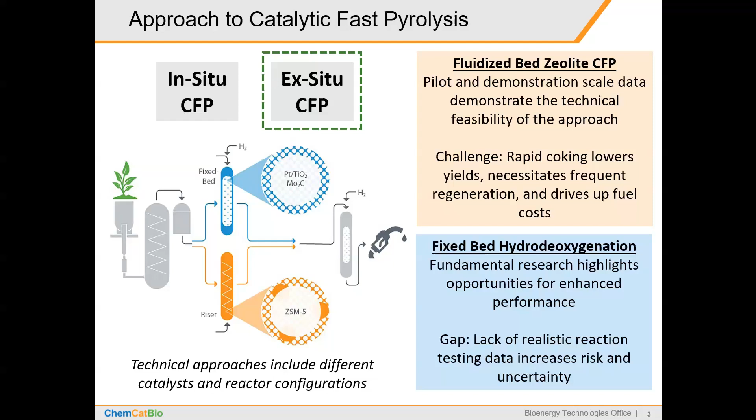But really, the gap here is that a lot of this data has relied on model compound reaction testing or been performed at the microscale and not always in a continuous fashion. And so there really is a lack of realistic integrated reaction testing data, which serves to increase the risk and the uncertainty of this approach. So one of our goals with this project experimentally has been to help close this gap by providing an industry-relevant experimental assessment of fixed bed hydrodeoxygenation.

And so to do this, the feedstock that we used was a commercially harvested combination of debarked loblolly pine stemwood and forest residues, which was procured and processed by our partners at the Idaho National Lab. In terms of the catalyst, we used a platinum supported on titania material that was developed here at the National Renewable Energy Lab. The metal loadings for this catalyst ranged from 0.5 to 2 weight percent, and importantly, for the data that we'll show today, all of these materials were prepared with commercially available technical supports as opposed to powders.

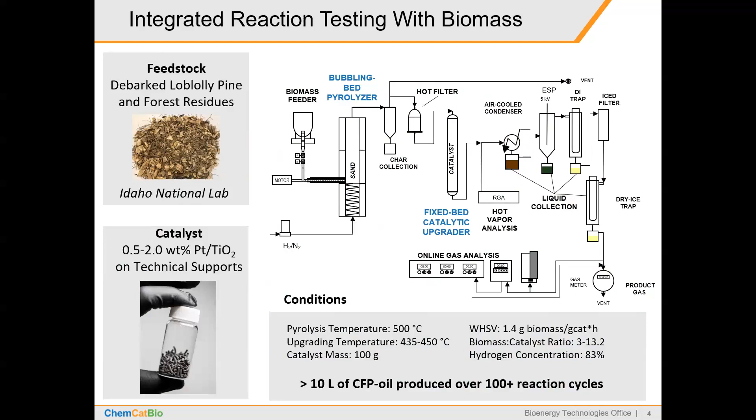The reactor system that we used was one of NREL's large bench scale integrated reactor units. It was operated near atmospheric pressure with about 100 grams of catalyst per experiment and a biomass flow rate of between 100 and 200 grams per hour. And one of the nice things about this reactor is it allowed us to collect considerable quantities of upgraded CFP oil for downstream processing as well as detailed analytics, on the order of 10 to 12 liters over the experimental duration.

Okay, so just very briefly touching at a high level on some of the data that's been collected, and as an aside, there's certainly more information available in the citations shown on this slide and the other slides throughout the presentation. In terms of key metrics, some of the things that we track are the carbon yield of the process and the oxygen content of the oil. What we like to see when these are plotted against each other, as shown in the figure on the left, is high yields and low oxygen content. So shifts to the upper left quadrant are desirable. And in fact, that is what we observed for the platinum titania material compared to a ZSM-5 baseline collected both through our own internal experiments here at NREL as well as data from the literature.

We also wanted to assess the stability of this reaction over about 140 reaction regeneration cycles. And nicely, what we observed after a short induction period was good stability in terms of the carbon yield and the oil oxygen content. Certainly there's more work to be done here to really prove out overall process durability over the long term. But we were very encouraged by this promising proof of concept data set, and I think it showed that our catalyst could be regenerated effectively at the bench scale using fairly straightforward oxidative techniques.

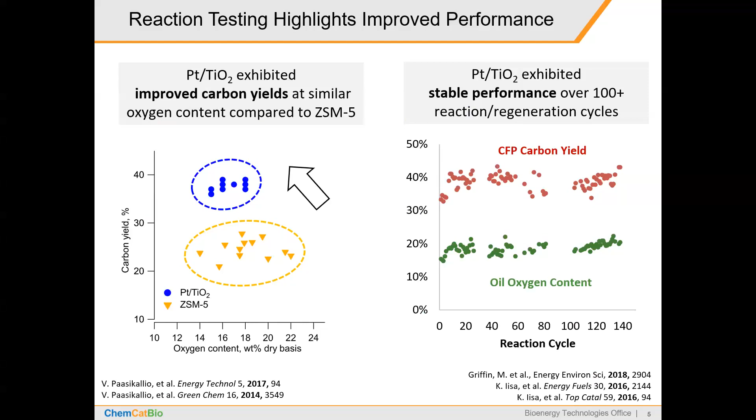All right, so we worked closely with our collaborators, Huamin Wang and his team at the Pacific Northwest National Laboratory, and they did some nice work to show that this platinum titania CFP oil could be hydrotreated using a single stage for greater than 80 hours without any indication of fouling or plugging. The carbon yields for the hydrotreating step were quite high, 89%, and the oxygen content was below 0.2%. I want to take a second to emphasize that this was done with a single stage system. From a practical standpoint, that's an important step forward compared to the hydrotreating of raw pyrolysis oil, which often requires multiple stages for stabilization and is prone to issues associated with fouling and plugging during the feeding process.

So fractionation of the hydrotreated CFP oil showed about 45 weight percent in the gasoline and 39 weight percent to the diesel fraction. This was pretty high selectivity to the distillate range, maybe a little bit higher than we expected before doing these experiments. So that was a nice surprise and aligned well with our goals of producing fuels for the heavy vehicle transportation sector, which is more difficult to electrify in the near term. The fuel testing that we've been able to do for these fractions reveals the need for continued R&D. The octane value for the gasoline fraction was measured at about 65, and the cetane value for the diesel fraction was 24.

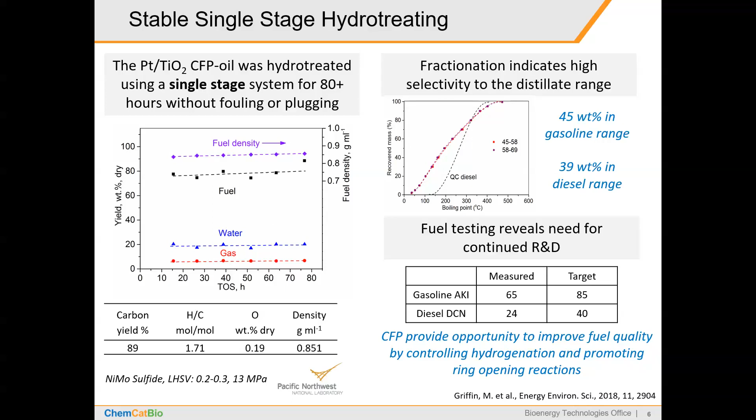All right, so in terms of overall process yield, so CFP plus hydrotreating, we saw values of about 36% for platinum titania compared to less than 22% for a ZSM-5 process. And we know from techno-economic analysis that this is one of the key cost drivers for the process. And so these improvements really do translate to considerable reductions in the fuel production costs. Our conceptual process models indicate a minimum fuel selling price of about $3.80 for the platinum titania pathway. That's for a fuel-only standalone biorefinery approach.

And so it's important to point out that there are opportunities for further reduction through things like refinery integration or the generation of chemical co-products, for example, that could push these costs much lower down towards $3. And that's, again, certainly something that we're continuing to work on. Importantly also, this pathway provides a considerable reduction in carbon intensity. So life cycle analysis shows a greater than 50% reduction in GHG emissions compared to petroleum-derived gasoline and diesel, for example.

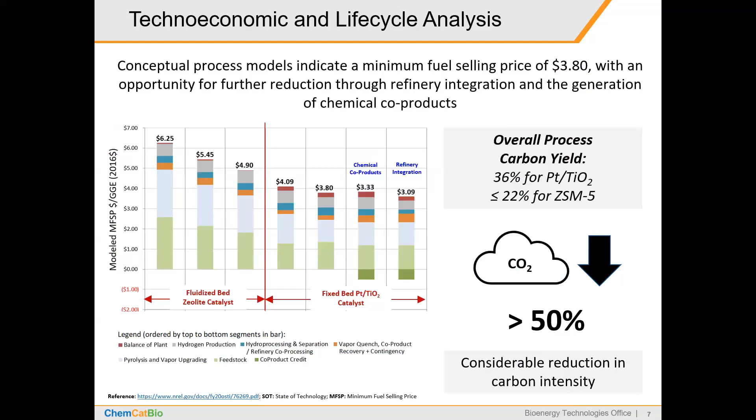All right, so in terms of a summary and research needs, our integrated reaction testing confirmed the potential for improved performance from fixed-bed HDO and motivated investigation of process scale-up. So we saw high yields, improved relative economics, low emissions. The initial assessment of process stability looks good, more work to be done there. And so that really brought us to a point where we're thinking critically about how this technology translates best to

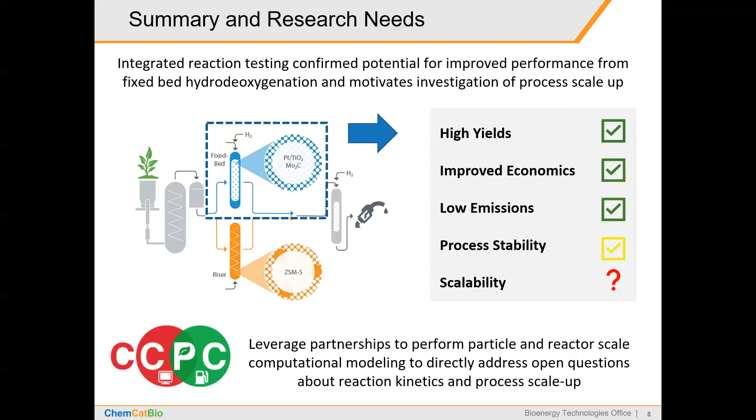a commercial scale system. And as part of this effort, we've been really fortunate to have collaborators within the CCPC, which is a computational consortia that I think Brennan and Bruce will speak more about. And we've been able to leverage those partnerships to perform some really nice particle and reactor scale modeling. And this has been instrumental for us as an experimental team to help us get a better understanding of the reaction kinetics and address some of the questions about scale up and identify some needs for continued R&D in that area. So with that, I'm excited to pass it off here to my colleague Brennan, who is going to talk about some of the multiscale modeling that he and his team have done.

Thanks, Mike. In this next part of the talk, I'm going to be discussing how we teased out fundamental information from benchtop packed bed reactor experiments with multiscale modeling. A lot of promising bioenergy technologies tend to fail at scale up. Why is this? Well, one of the reasons could be just the scaling factors are not linear. For example, a tubular reactor. The surface area scales to the power of r squared, the volume to the power of r cubed, and heat transfer can be difficult. That's just one basic example.

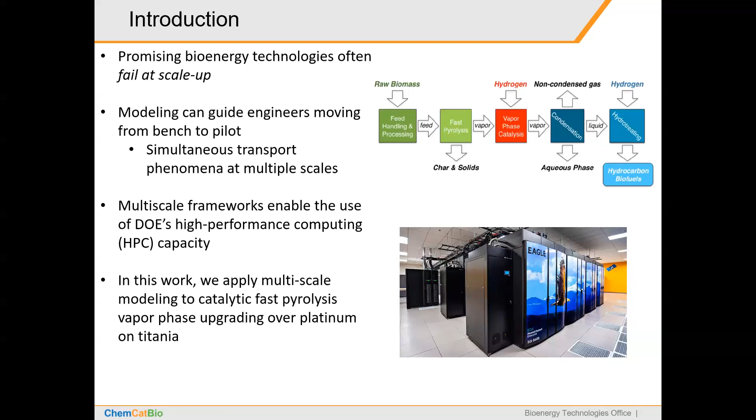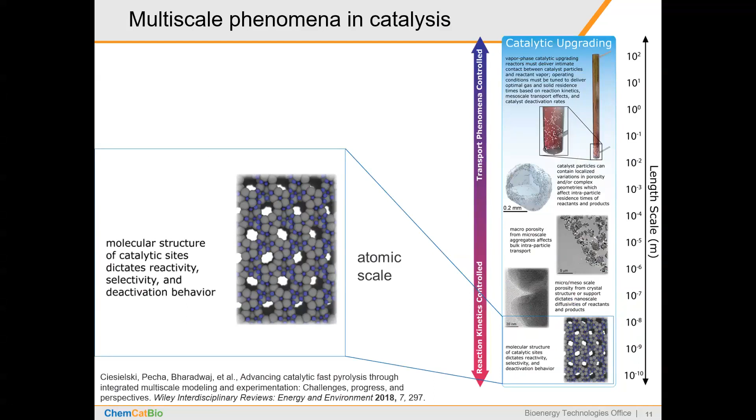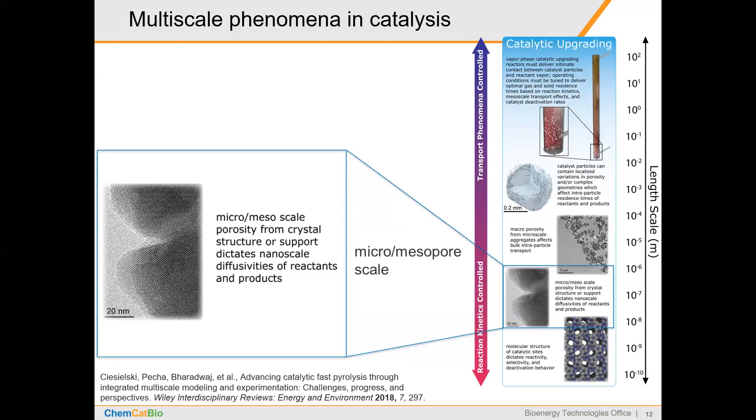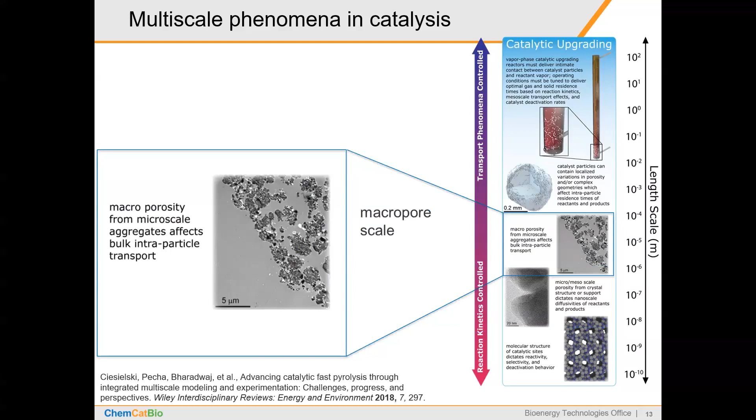If we can take one step back, we need to understand the multiscale phenomena before we can understand how to apply them to the models. At the atomic scale, the molecular structure of catalytic sites dictates reactivity, selectivity, and deactivation behavior. Moving up a scale, the micro and mesoporosity that emerge from the crystal structure or support dictate nanoscale diffusivities of reactants and products and attenuate the reaction at that scale. Even a scale higher, the macroporosity on the order of microns that emerges from microscale aggregates affects bulk intraparticle transport, again attenuating the reaction rate.

Finally, the catalyst particles themselves don't necessarily have an ideal shape. There might be variations in porosity within the catalyst, like shown in this image of one of our ZSM-5 catalysts. And those will impact intraparticle residence times of reactants and products. And then finally, the reactor itself can dictate the environment that each of those catalyst particles is exposed to. And a poorly designed reactor will not take advantage of all the catalyst particles present, and you'll observe an effective reaction rate that's lower than you might expect from an idealized system.

So in conclusion, the observed reaction rate that we see is really a combination of the intrinsic reaction kinetics, intraparticle diffusion, and extraparticle diffusion and convection. So in all systems, those need to be taken into account when you're developing a model.

In this case, we're looking at just the packed bed reactor from that benchtop system that Mike described previously, which is a very well-designed system so that we really don't have too much radial variation in the diffusion. And that allows us to create a relatively more simplified model than those high-resolution models that have been presented in the literature. Next slide, please.

The data can really be interpreted best so that we can fit a tractable model by lumping together the chemical products that we observe in the GCMS and through other characterization methods. We have low molecular weight pyrolysis vapors that we consider highly reactive. Those include ketones, aldehydes, acids, methoxyphenols, and sugars. OX represents partially deoxygenated compounds. That's one of the products, an intermediate product, I would say.

For example, phenol, methylphenol, furanics, cyclopentenones. And then hydrocarbons, which are fully deoxygenated aromatics, alkanes. And then we have light gas, LG, coke, that's on the catalyst itself, and light condensables like acetaldehyde, acetone, butanone, and then a fraction of high molecular weight pyrolysis vapor that is considered less reactive, often in the form of aerosols that can pass right through the reactor system.

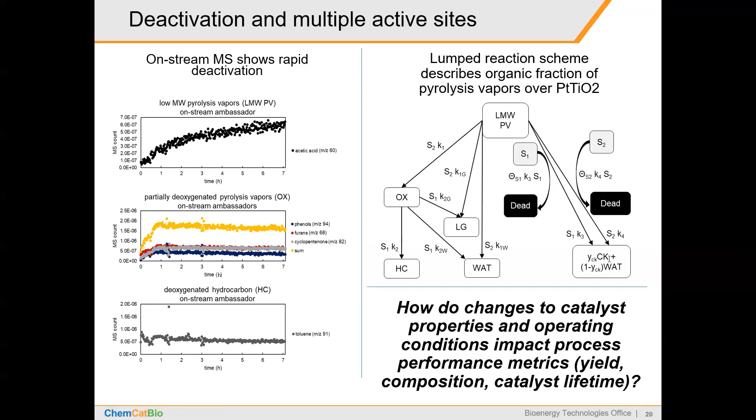How do changes to the catalyst properties and operating conditions impact process performance metrics like yield, composition, and catalyst lifetime? To address that problem, we need to be able to accurately model multi-step reactions. Typically, that requires heavy computational resources to directly numerically simulate that system. But that's not really suitable if we don't have existing rate constants. In this case, we're going to have to extract those rate constants by doing parametric sweeps. To do that, we need a faster solving model. An analytical solution for diffusion, reaction, and deactivation we believe is mathematically feasible and can help accurately represent multi-step reactions.

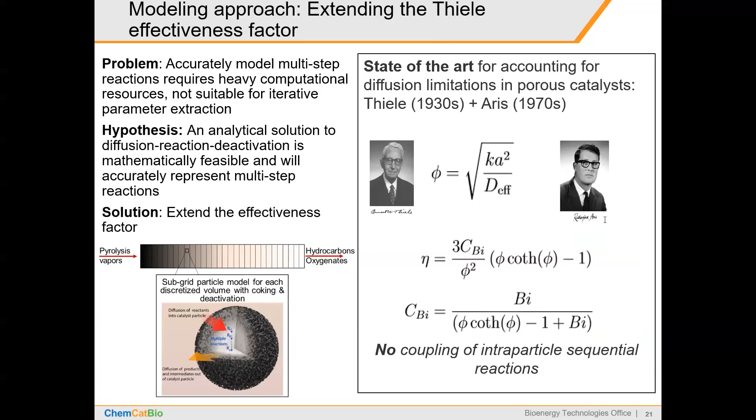What exists in the literature from Chapter 6 of Fogler, for all you chemical engineers, is the Thiele modulus. And that's illustrated here, and that's an analytical solution for reaction and diffusion. And Rutherford Aris did a lot of work expanding that in the 1970s. But there's no coupling of intraparticle sequential reactions in this solution.

So without digging too much into the heavy math, we start with the unsteady advection diffusion reaction equation, assume a sphere, non-dimensionalize it, apply the boundary conditions, and we end up with a form that is commonly seen in differential equation textbooks.

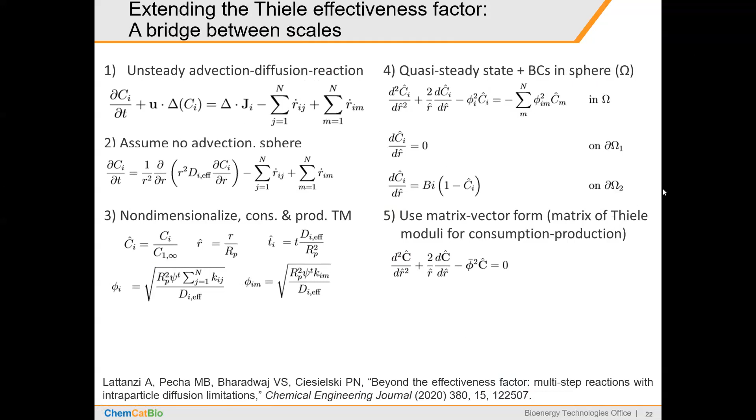And then when the eigenvalues are real, the solution is a hyperbolic function, converting back to concentration, and then volume averaging the rates, we end up with an effectiveness vector, not a factor, but a vector, which is a system of equations that can be easily solved using common software like MATLAB or Python, using matrix decomposition, etc. We end up with individual rates for each of the reactants and products. That includes the multi-step effectiveness vector. More information in that paper below if you're interested.

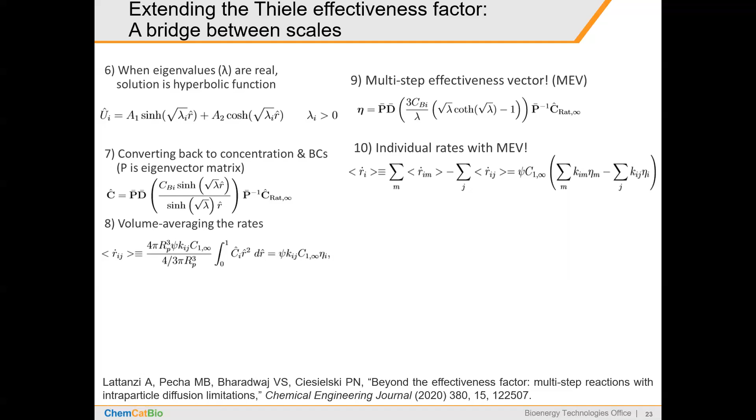What's useful for that is that provides us a solution for the particles, intraparticle diffusion and reaction. And then we need to apply that to a packed bed model. In this case, we had assumed an axial dispersion model and used method of lines to numerically solve the packed bed system with the transport equations shown here.

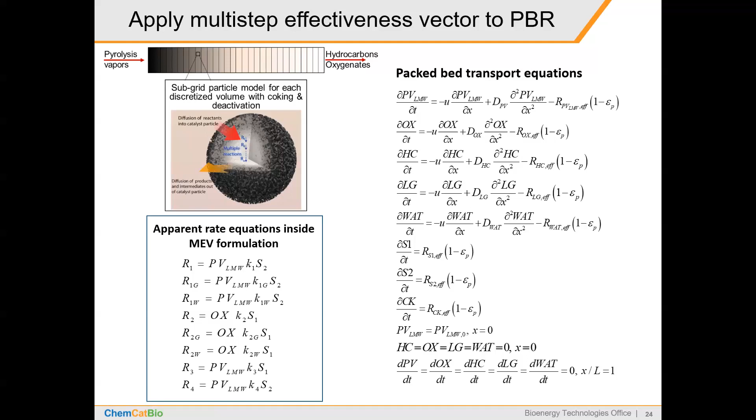And again, those rates are not just straight reaction rates for the particle, they are solved at each of the nodes for that multi-step effectiveness vector. And that gives us a multi-scale fast-solving model. Next slide, please.

To parameterize the model, we did some multi-scale imaging of the platinum and titanium catalyst particles with the help of Peter Ciesielski. Light microscopy showed the particle size on the left. Scanning electron microscopy gave us the particle surface structure. And then TEM showed us the distribution of platinum sites, and we can see that it's really well evenly distributed throughout the catalyst particle in approximately 5 nanometer dots.

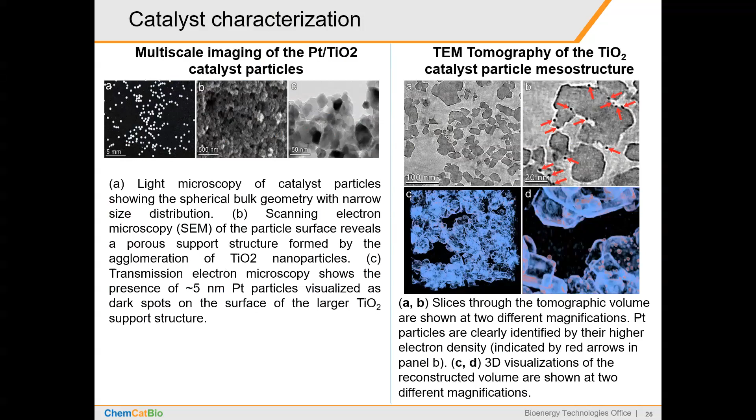We applied that as well as all the other operating conditions to the model, and we initially guessed the 10 rate parameters for one temperature and fed the entire multi-scale packed bed model through a simplex parameter optimizer in MATLAB to essentially fit these rate constants. And we end up with a solution that matches well for this initial base case with 0.5% platinum, 0.5 millimeter particles, and biomass to catalyst ratio of 12.

To validate the model, remember we have that nice set of 4 unique cases. The second from the top on the left is that base case that we fit to, and we can see the final yields match almost perfectly within the error. For the other cases, which are drastically different in terms of how long they were operated, feed, and the platinum loading, we were still able to accurately capture the yields, and that gave us a lot of confidence to explore different parameter spaces and inform the experimental team how to design catalysts. And we can see that in the next slide.

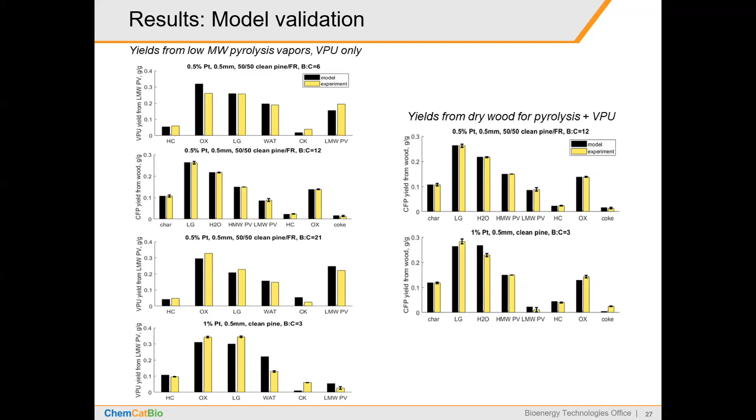On the left, we have coke concentration versus reactor length. And that's important because one of the outputs of these models was this coke concentration, which is used to inform catalyst regeneration. And we can see that there's a lot more coke at the entrance than at the exit. And that's not initially assumed, but we realized that the vapors are traveling over the catalyst. They're entering at the entrance, and of course they're going to form more coke there.

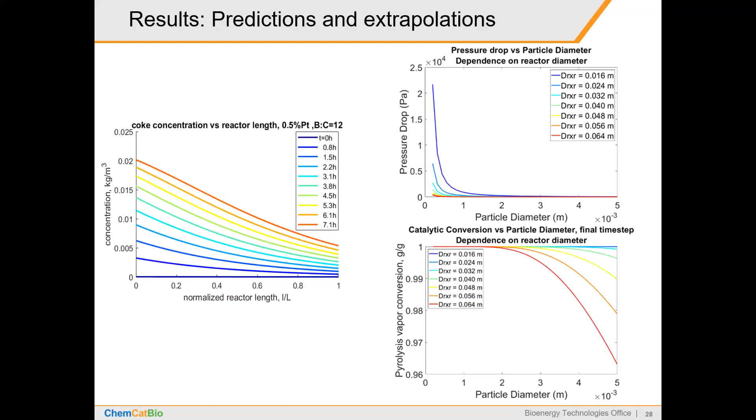On the right, on the top, we have pressure drop versus particle diameter for different reactor diameters, and we can see that there is a particle diameter limit, as you might expect. If you get too small, your pressure drop is too high. But that needs to be balanced with vapor conversion, because better conversion occurs when you have smaller catalyst particles. And we did identify there is in this type of system a nice operating regime between particle diameter of 1 and 2 millimeters that gets optimal yield with minimal pressure drop.

In conclusion, a new multi-scale simulation framework was capable of capturing multiple cascading reactions, multiple operating conditions, and catalyst loadings, as well as active site deactivation. It's fast and accurate. It can be used to mine good old data. Future work will extend the model to other catalyst shapes and other technologies. In the next slide, you'll see how results from this work were used to design a catalytic regeneration system at a much larger scale with a different set of modeling tools.

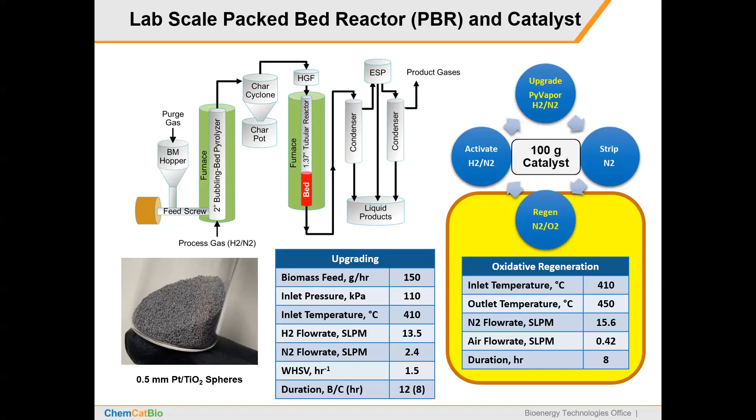Okay, the scale-up objective for all of this work was the TCPDU, which is the Thermochemical Process Development Unit located at NREL. And again, this is all focusing on the packed bed reactor, the PBR. In this unit, early on, we picked a catalyst loading of 6 kilograms with 9 kilograms per hour of biomass for a space velocity similar to our small lab scale unit, but with a scale-up factor of 60.

Okay, there were some constraints that we were able to identify very quickly. I've listed some of them here. Some of them are because of the gas flow and pressure drop limitations in the actual TCPDU hardware. Some of them are because we wanted to apply constraints that would help us go to the next step in scale-up. For example, no wall heat removal so that we could mimic an industrial scale reactor.

Picture on the right shows you a mock-up of a catalytic reactor that we built at the National Energy Technology Laboratory, and a couple of extremely qualified guys helping me construct that. We did a number of loading tests. We did a number of pressure drop tests. This is the kind of thing that we used in combination with the modeling to make sure that the physical issues surrounding the reactor in the TCPDU would fit and make sense, and B, that we could get the kind of data that we needed to support the modeling. So next slide, please.

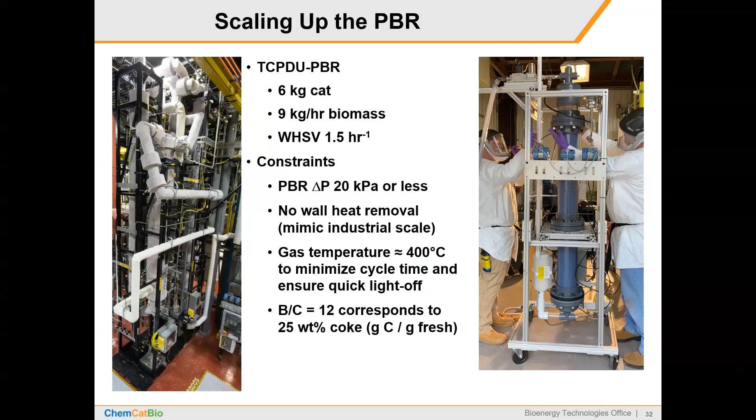Going a little bit further into that TCPDU system, we possess 3 existing reactors, and each of these reactors had 3 internal heating rods. We called them bayonet heaters, which can be converted to cooling tubes. And so initially, from early on, we looked at the overall pressure drop. We looked at some back of the envelope heat transfer calculations, and we said, look, it's really better, since we're not going to operate the unit in full swing cycle, that we split that 6 kilogram bed between 3 existing reactors of 2 kilograms each. So we brought the scale-up factor down to about 20.

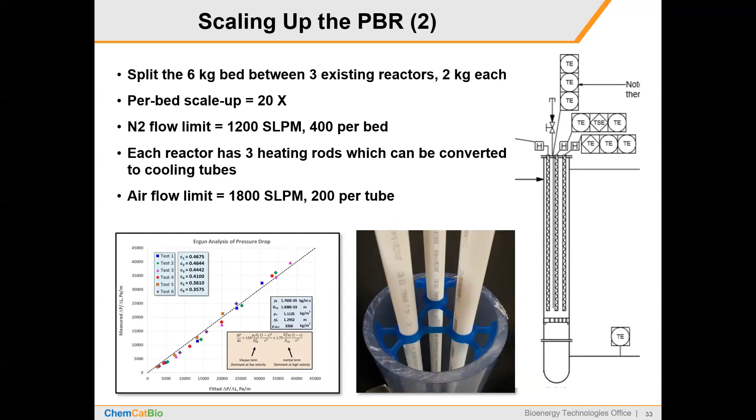Now, there were some strict gas limitations, for example, total nitrogen flow in the lab is about 400 per bed, and total compressed airflow limit works out to about 200 SLPM per tube. So again, this is all drawing the box that we have to operate in. Now here I show you some details of the model. On the left, you can see the TCPDU bed with 18 million catalyst pellets. There's a little 2 FBR bed with 900,000. So there you see your scale-up factor of 20.

In the middle, I'm showing you a couple of grid resolutions of the actual model using COMSOL to simulate these beds. We don't need to simulate the entire bed because it has 3-fold symmetry. So that saves some computational time. The important point here is that we looked at a range of griddings and what I call particle resolution, which is how many real particles each virtual particle has to represent. We covered a range from 120 at the high side to 40 at the low side of the TCPDU. And for the 2 FBR, for the small scale, we could even get down around 8 or 10. The take-home message there is all of our discretization studies showed us that we had very grid-independent, reliable solutions.

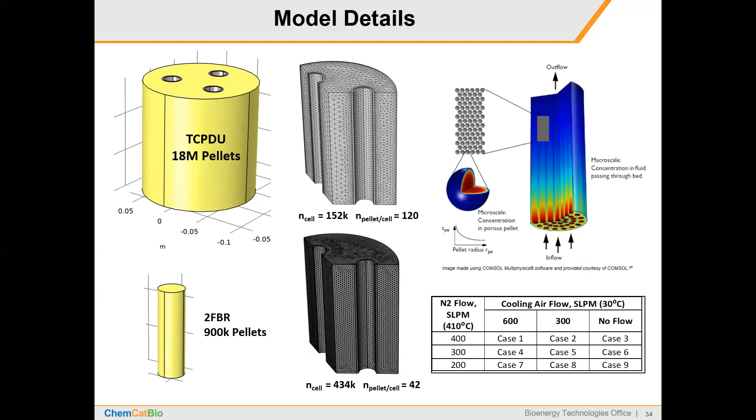So this was good. Last diagram here shows you an illustration. I'm sorry, if you can go back real quick. Of how the COMSOL reactive pellet bed handles the properties and reactions inside the pellet. Nowhere near as complicated as what Brennan showed you, but we deemed that for the purpose of a reactor scale model where we wanted some provision for intraparticle, intrapellet conditions to be simulated, that this was a good approximation. Next slide, please.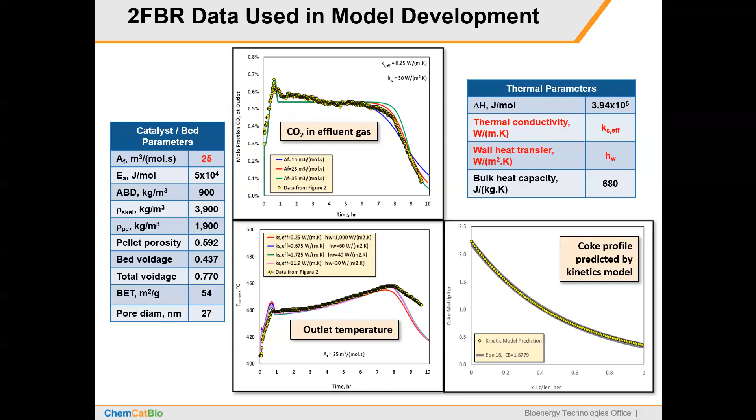The final slide over to the right, you heard Brennan mention that the coke profile predicted by the model developed by his team was very useful in enabling this type of modeling work, and that's absolutely true. COVID has prevented us from being able to analyze this coke profile experimentally, so with the information provided by Brennan's model, we were able to keep this ball rolling and take this all the way to model completion and prediction. Next slide, please.

Here's the takeaway from the 2FBR modeling data extraction process, and that is what combination of thermal parameters really best describe that particular scale of reactor. And I remember I told you there were 4 parameters that gave equal sets of measurements. I've basically drawn a locus here that says probably anywhere along this line you would have a similar fit.

When you look at what this means, all the way over to the left, you're looking at very low values of solid thermal conductivity and relatively high values of bed heat transfer coefficient. On the right, it's the opposite: bulk oxide values of thermal conductivity, but low bed heat transfer coefficients. Now, for our sweeping studies, we decided to look at all 4 of these combinations.

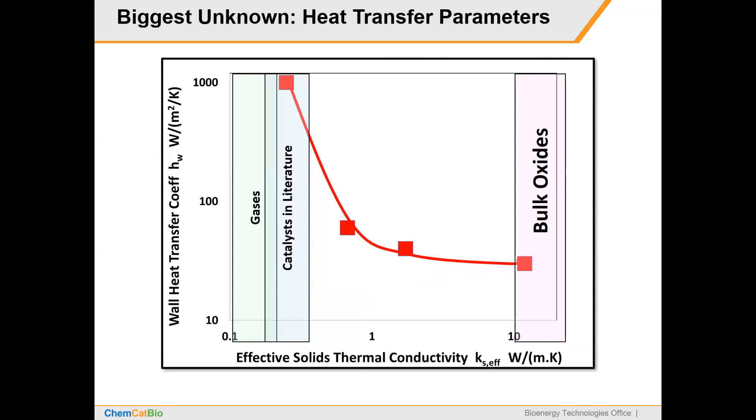But early on, we kind of put our money on the leftmost point that you see in this graph based upon 2 things. Number one, the catalysts that have been studied in the literature in detail do tend to show very low effective solid thermal conductivities. And number 2, most of the published bed heat transfer correlations for particle sizes in this range are well above 100 watts per meter square Kelvin. So that's where we kind of put the focus for the rest of the study. Next slide, please.

Here are some 3-dimensional images of temperatures, temperature gradients, and heat up and cool down rates for the 2 cases with the maximum process air and no cooling air versus minimal process air and maximum cooling air. And these are the kind of things that we looked at in carrying out this study. If you give me one click there, Mike.

You can see, for example, sharp gradients in the region where we're using the cooling tubes to do most of the heat extraction. Not surprisingly, we would have very sharp gradients there. These are showing up to 300 degrees, say, per centimeter. It can actually be much higher, as I'll show you in the next slide.

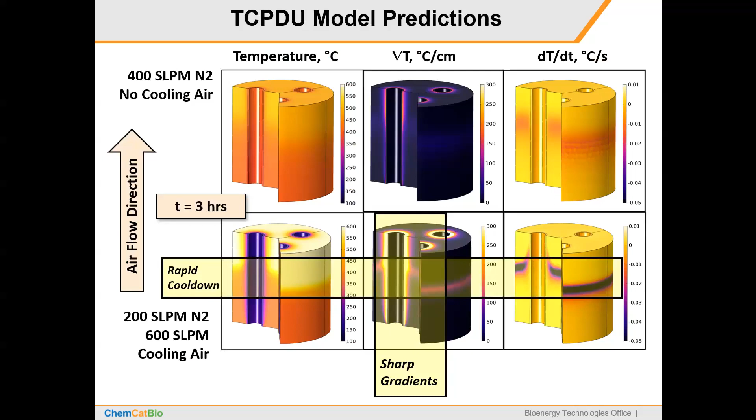And then if one more click, Mike, also a rapid cool down region. We saw this a lot in our simulations, depending upon process conditions and those thermal parameters. In this case, the process gas is flowing slowly, so as the combustion front moves, it leaves a very sharp cool down region in its wake. Next slide, please. So we went a little bit further.

We looked at a lot of other different ways of looking at this information from these models. Also, we looked at the intrapellet gradients that I'm showing you on the upper right to make sure we were handling the diffusional properties of that pellet correctly. We produced reduced order models, looked at a whole lot of things, and I don't have time to share all those details, but there is a publication that we just submitted to Reaction Chemistry and Engineering, cited here on the bottom. And if anybody's interested, I can certainly send you a draft version of this presentation.

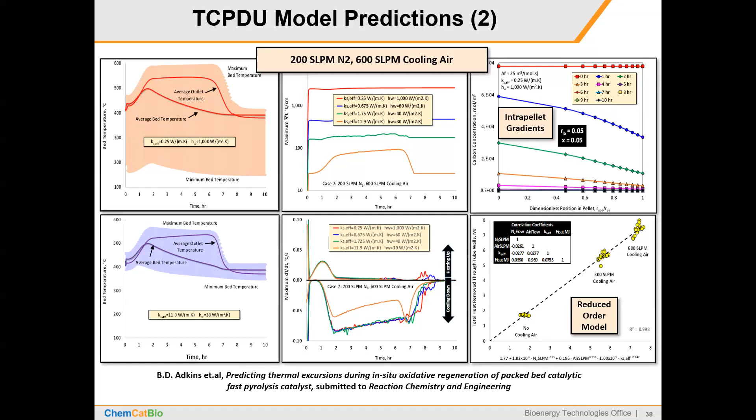Now we'll go to the conclusions from all of this modeling work. Conclusion number 1 is that the risk of catalyst damage and/or accelerated irreversible deactivation from the thermal excursions is high in this proposed design. It's going to be a tough call to make this design work. The real issue is a very small catalyst particle size, which constrains bed depth and process gas flow, both of which constrain heat removal. We are considering some design improvements.

You heard Brennan mention using reduced order models to map the catalyst bed design space, not just for upgrading, but also for regeneration. And we have started evaluating moving bed alternatives to packed bed reactors that are not like fluid beds, but more like CCRs, continuous catalytic reformers. No time to talk about that plan here today. One important conclusion is, although small by industry standards, a scale-up factor of 20 can be substantial, as we've demonstrated here.

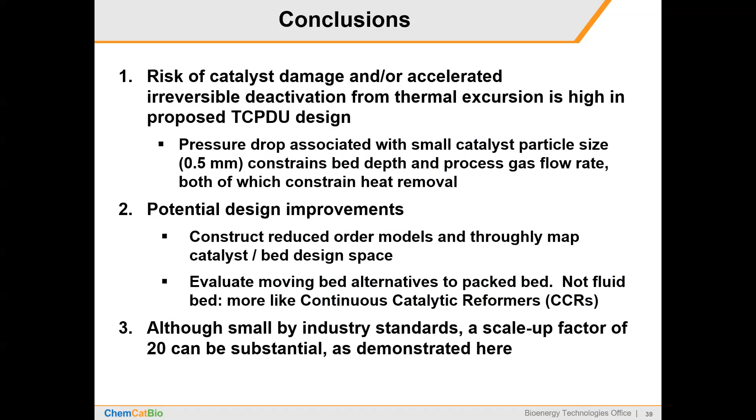Next slide. I want to say just a couple more words about the improvements in the models that we've developed here. Number one, we would like to firm up the conclusions from the regeneration model by addressing the two key unknowns, and that is the thermal conductivity of the catalyst pellets and the coke distribution, not just in the bed, but also ideally within the catalyst particles.

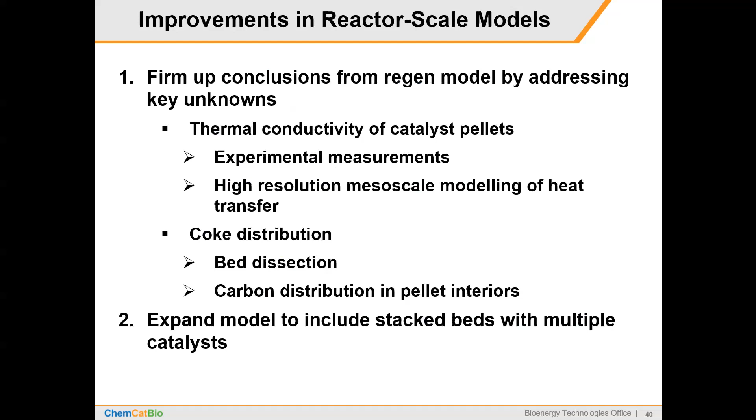The second thing I want to say just a slide or two about is an idea that we've had to expand this kind of model to include stacked beds with multiple catalysts, and we want this also to be able to handle combinations of exothermic and endothermic reactions. And even, for example, if we're decoking a stacked bed of catalyst where we would have different coke levels.

So here's the illustration of the model as it exists today. It's in a fictitious system where we're basically saturating benzene in an exothermic process and then hydrocracking cyclohexane to butane and ethylene in an endothermic process. And you see the list of parameters that can be adjusted on a bed-by-bed basis. Basically, everything is possible in this COMSOL model in terms of bed-specific parameters.

A couple of examples I've shown you: what happens if we switch some of the wall heat transfer off in certain beds, what happens if we apply different wall temperatures to the beds as if we had different zones in our furnace. So you can do a lot of possibilities with combinations of conditions in this reactor.

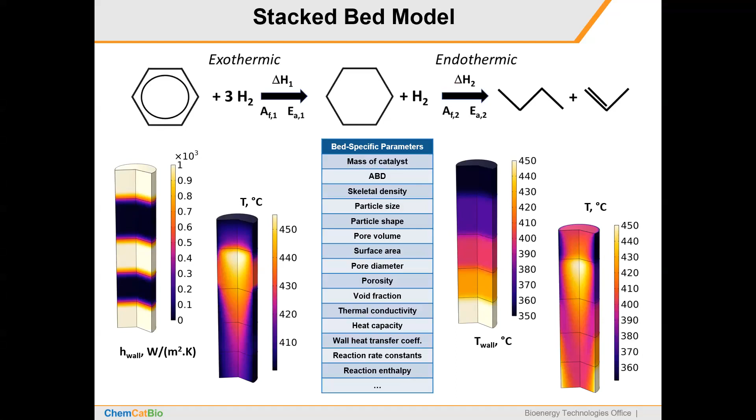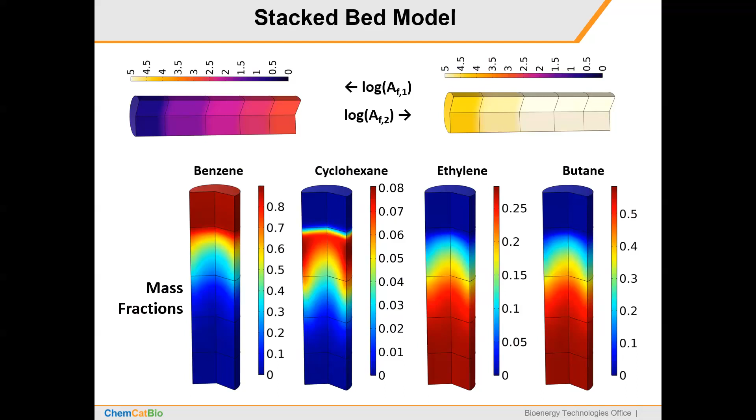And so this model is something that we definitely intend to be building on for future efforts, including catalytic fast pyrolysis. And that should bring me to our acknowledgments.